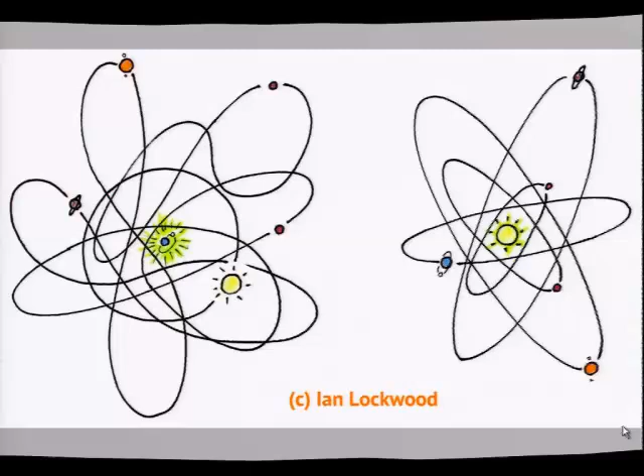And how do we get into this big mess? Well, when scientists thought that our sun and the planets revolved around the Earth, they had to concoct these complex formulas to predict orbits. And when they realized the planets actually revolved around the sun, the math sort of fell into place. In a similar way, when engineers put the car at the center of the universe, it's hard to figure out the relation to commute, schooling, all these other things you see floating around. When you put the person at the center, the design details accommodating the other components sort of fall into place.

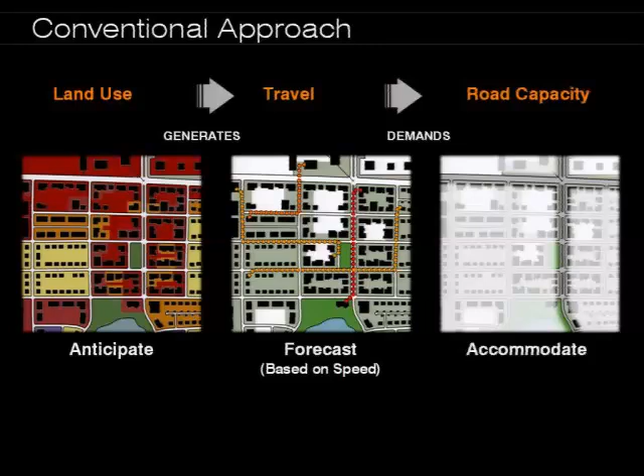Our conventional approach to transportation planning: land use happens, it generates travel and demands roadway capacity. Now, how is land use integrated in this process? Future land use is anticipated, traffic is forecasted, and the future investments are expected to accommodate the demand. So how can we do this differently? Well, can transportation investments be multimodal? Can they help manage traffic or travel and be coordinated with land use?

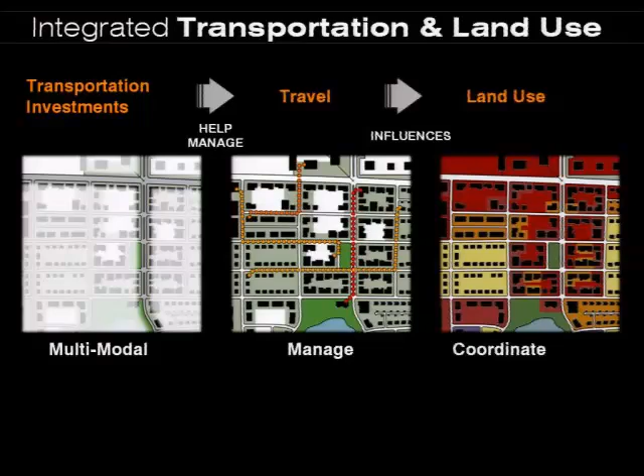Well, multimodal facilities need to be planned along with land use. They need to address the demand for walking, cycling, and transit, as well as driving. Here's what we are developing to address these demands. In Florida Department of Transportation, we have what's called a Plans Preparation Manual, which includes a chapter entitled Transportation Design for Livable Communities. That chapter tells us that prior to being able to apply these guidelines, we need involvement of the right stakeholders and incorporation of the chapter's intent during the planning and project development processes. The problem is, no one has written a corresponding planning chapter yet, and that's where we're at.

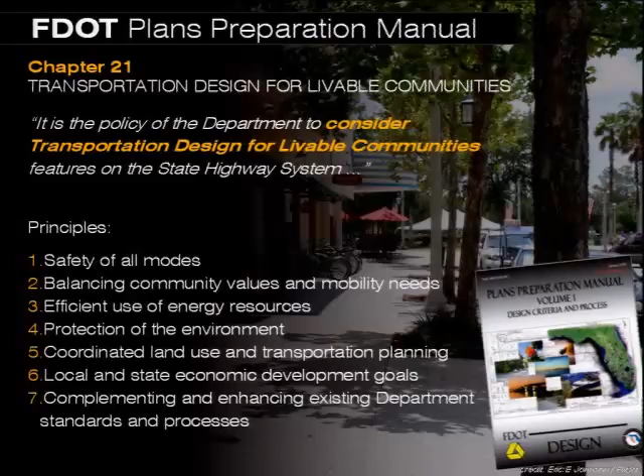The basic formula for transportation planning starts with asking the right questions, not simply asking our partners what projects do you want, because usually they say widen something. That's what we've been doing for the last 30 or 40 years. But we want to determine what problems we have first, what opportunities we have, and how we can work with stakeholders to make our communities more competitive and sustainable.

Here's a quick example of a DOT-led planning study we recently completed: State Road 50, a multimodal corridor study in the city of Clermont, south Lake County in Florida. Here's the process we used, beginning with the rationale for the study and determining the challenge at hand. We obtained a detailed understanding of the problem through stakeholder interviews, mapping and analysis, fieldwork, and traffic modeling and analysis. We developed guiding principles through a planning charrette that will be used to develop and evaluate future corridor scenarios. Then we prepared a corridor action plan.

So that's totally different than the way we're doing things today. These are the ways we really look to see the interests of our stakeholders, what do they really want, and how can we deliver it. We are developing ways to deliver this that are not in accord with the trend as we have it now. Thank you.

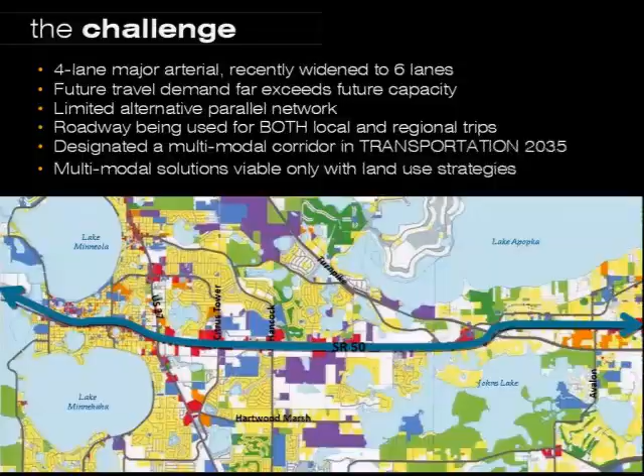And so this is what it looks like. The corridor is State Road 50. The pattern is pretty suburban in nature. Just a little more context: this is State Road 50, downtown Clermont, which is a small historic community on the western end of the corridor. But 30 years ago, along State Road 50 were all rural citrus orchards.

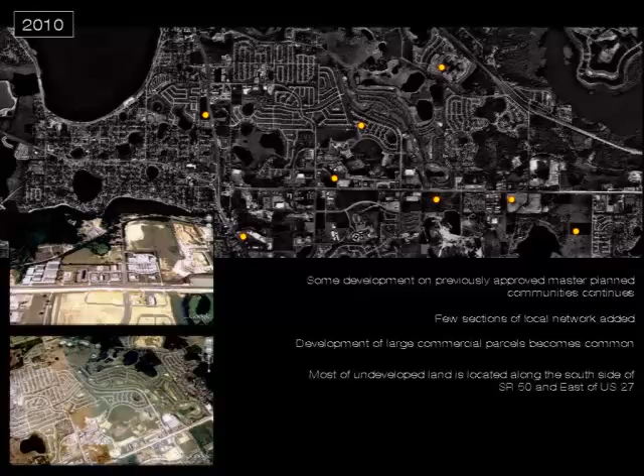So the suburbanization didn't happen that fast or that long ago. This is 1999, fast forward, all the orchards are gone. There were a couple of freezes that happened in there, but this is 2010. So it's dramatic suburbanization that caused the issues State Road 50 is handling. State Road 50 transformed from a commuting regional corridor to one that has to accommodate both local and regional traffic, and within how the state roadway is designed, it was really tough for that corridor to handle it.

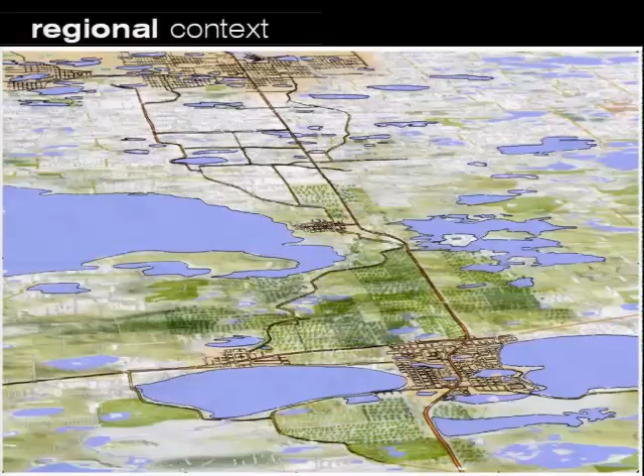Zooming out a little more, John mentioned that it is west of downtown Orlando. So downtown Orlando is here, this is Clermont, the small town, all the citrus farms. What really changed its use and function is not only because of this suburbanizing pattern, so Clermont transformed into a bedroom community, but also the regional roadways that happened. This is the Florida Turnpike, State Road 408, that connects downtown Orlando to this site, which changed what is needed for State Road 50. So the function of the road, and the road itself supporting the community, changed.

So this is it again in context quickly. John mentioned that we looked at traffic, and this notion that this is a commute corridor with only regional traffic going to Orlando using it, we were surprised to realize this is no longer the case. More than 50% of the traffic on a state roadway designed to accommodate regional traffic is actually local serving traffic. They start within the corridor and end within the corridor, so they are trips of 3 miles or less that could be done with another mode if the facilities for that mode were there and the land uses were set up right.

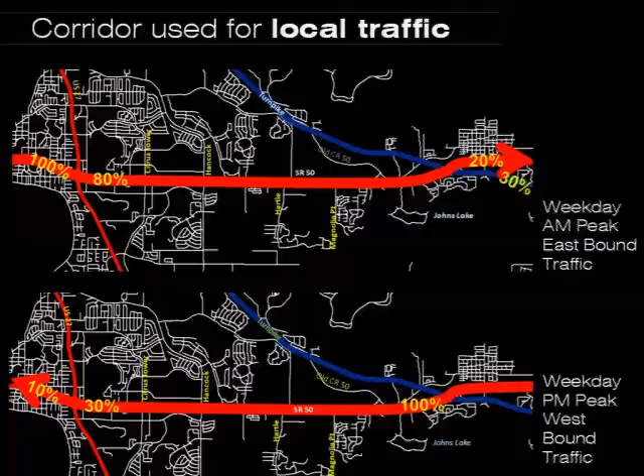So again, why does this happen? This is downtown Clermont's street network. This is the network east of Clermont. This is what happened in the last 30 years. So again, which one of these networks would allow for the multimodal travel that we keep talking about?

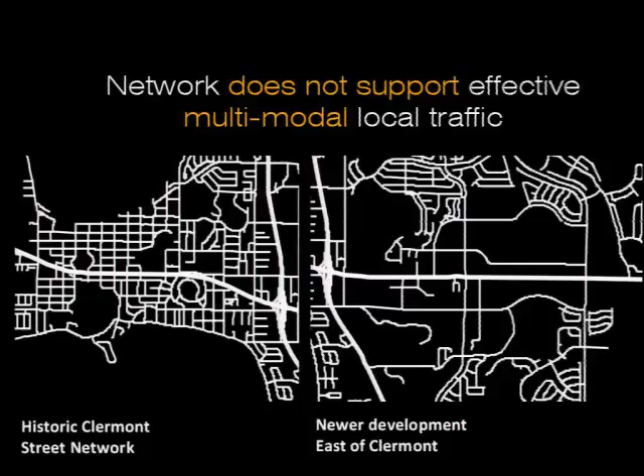As John mentioned, we're serious about engaging the local land use partners in this exercise. We did hands-on interactive charrette sessions, understanding what the issues are. It came out not just from the data we were looking at that local traffic is the more important one to solve, but also from the stakeholders' input themselves. We developed some guiding principles. I'd like to call your attention to the fifth one that the stakeholders told us: turn the car around.

So we really don't want to be a bedroom community to Orlando anymore. We want to be a complete place within our corridor, within our community, and we don't want to drive out of the corridor. So we were communicating with municipal leaders, business owners, and property owners through this workshop and through this study, and we wanted to make sure we develop concepts that speak to them.

These two concept plans happen to be a demonstration site along State Road 50. It's a greenfield site that had a planned development of regional impact—a DRI—of 30 acres. When we started the project, they said, well, we are really serious about multimodal. We designated our corridor a multimodal corridor from a policy perspective. Is that enough? Multimodal requires a certain land use, which John talked a lot about.

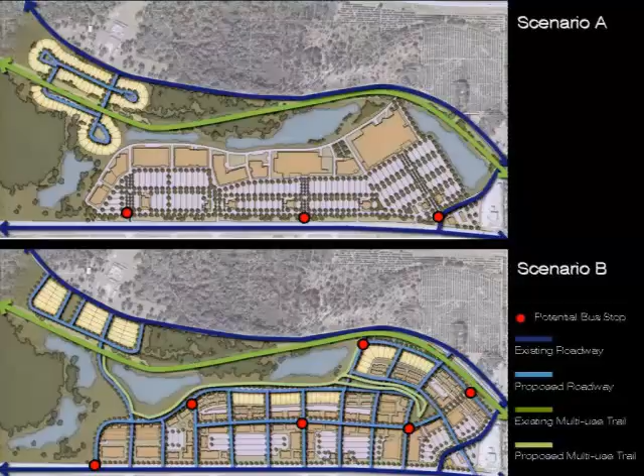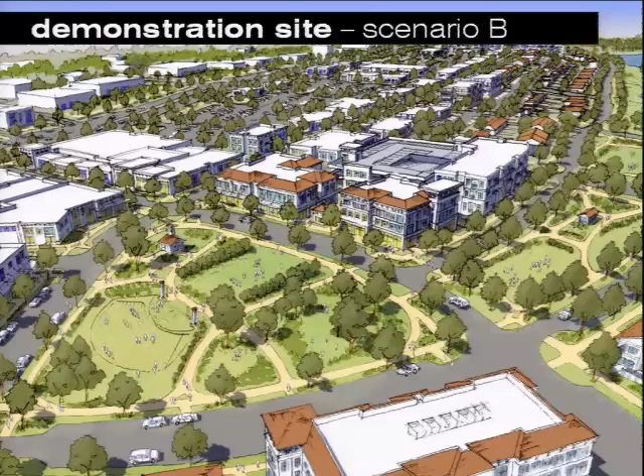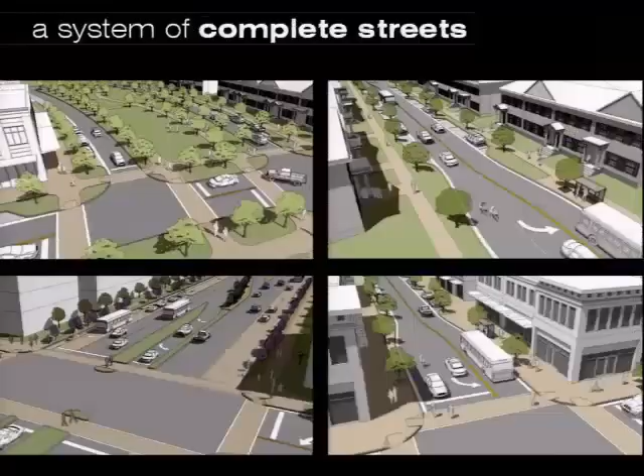So here are just some images of what that might look like, and we shared this with the elected officials and community leaders to really speak to them. Clermont, as you know, is a small town, and densities are important. They want to see what kind of development we're really talking about, how transit could be incorporated, and developing a complete system of streets that serves local traffic as well as regional traffic at the same time.

One more point—this is borrowing from one of our own, Peter Katz's work in Sarasota County. The DOT has recognized that transportation investments yield economic development, but specific transportation investments yield different types of economic development.

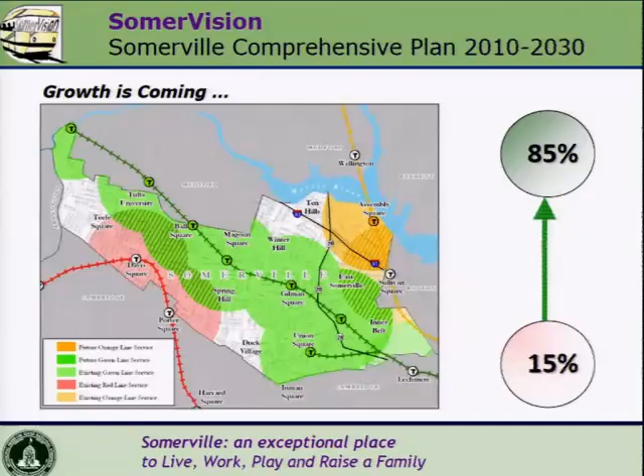So the first thing I've learned deals with our comprehensive plan, the SomerVision comprehensive plan we just finished. Comprehensive planning need not be boring, and it can actually be really helpful to shape the center of a community, and to keep us a little edgy and make sure we know what we're doing. A lot of communities in Massachusetts don't even do comprehensive planning because not many people make us do it.

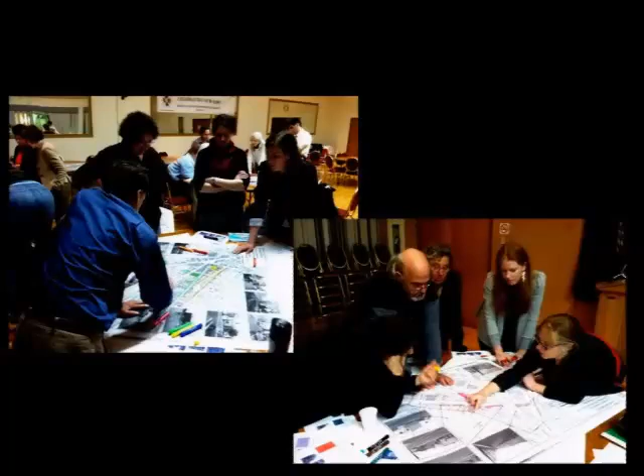But at the same time, we realized that with all this change coming, we needed to know where we were going. We needed an accessible, reasonable, easy to understand vision - a list of our values about diversity and community, a list of what's important to us in a community generally filled with 2- and 3-family houses on very small lots, a community well known for the fact that Cambridge seems to get all the economic development and we get all the 3-family houses.

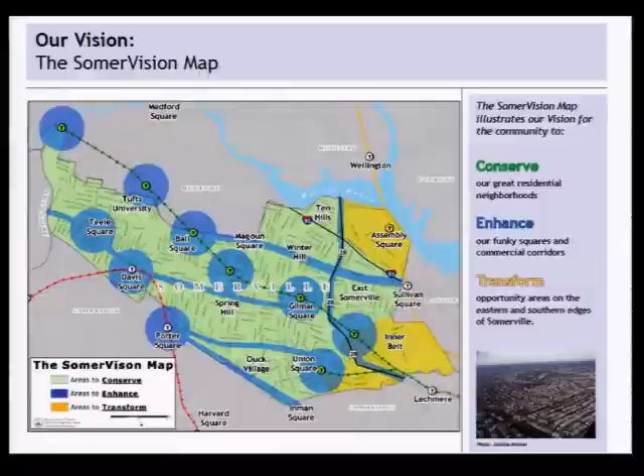But we could actually do some change with this transit while still protecting our neighborhoods, find an opportunity for 30,000 new jobs and 6,000 housing units, and do it mainly in areas around the transit stations while preserving our neighborhoods at the same time, and explain it all through a plan that actually has language accessible enough for people to understand what's going on.

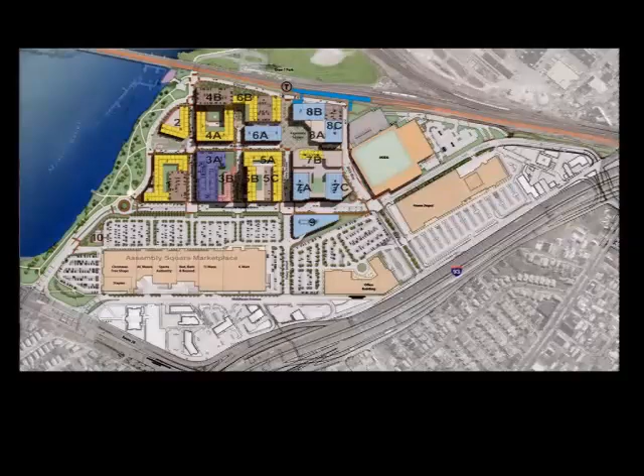So we finished that, and we've looked more into what's going on with our stations. We've had one running ahead of the whole process at Assembly Square—so far ahead they've been working on it for about 20 years, which taught me that good urbanism is worth the wait, and sometimes it's a very long wait. A half generation ago, people wanted to put strip malls up here with the train running by, and we pushed to get transit and access, and we got the opportunity to build a mixed-use development here, and hopefully someday get rid of the rest of the strip malls and really change the nature of the place.

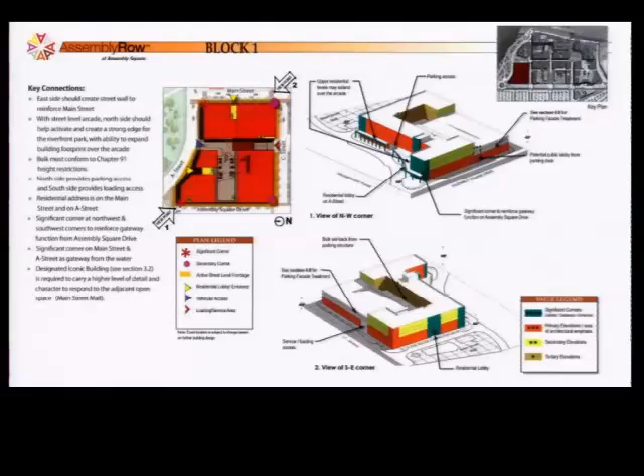In the process of doing that, we've also been able to, even without a form-based code, push a developer into giving us a design standard that's resulting in new construction and new activity around a transit station that's actually being built.

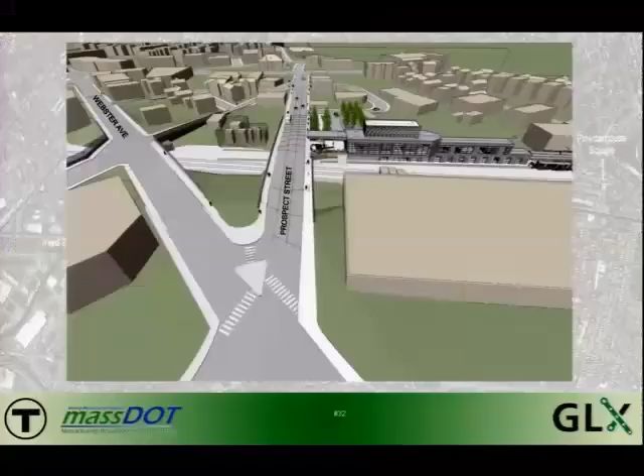We want to bring back the quality of everything we could do around our center, and there's a lot of excitement around Union Square, although we do have parking lots fronting some of our best restaurants—though our restaurant owners want to put pop-up cafes there, so I like that.

We've really looked at, though we don't necessarily have the answer yet, options like expanding the size of our plazas, changing one-ways back into two-ways, reclaiming our roads for ourselves, and making sure that when we sponsor transit-oriented development here, it can happen in a format that works for us.

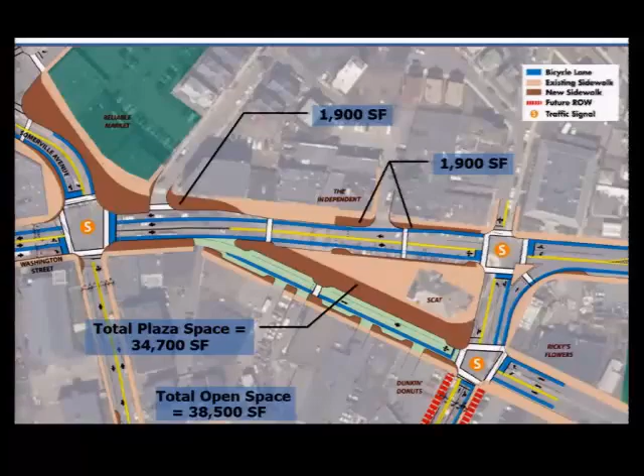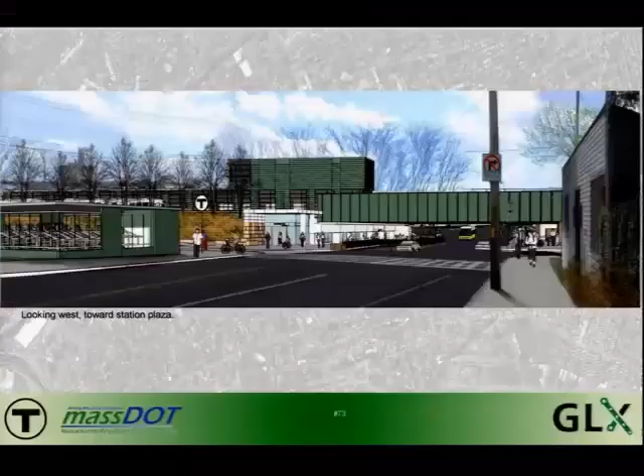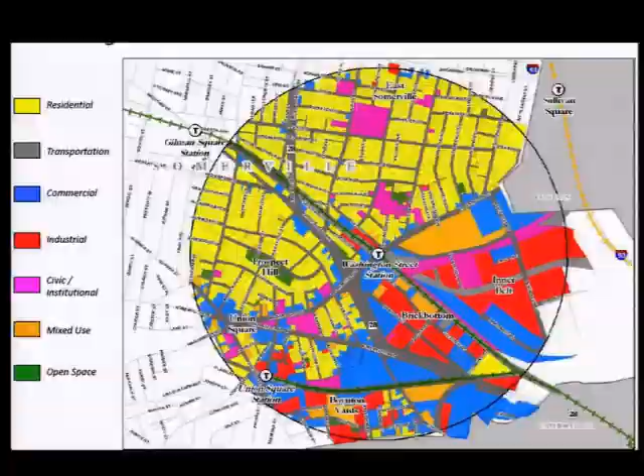What we started talking about is the idea of this being the one place in Somerville where maybe we'll actually allow someone to build a by-right project, creating a form-based code that allows room for creativity. What we've realized as we've done visioning there is you can do some really creative things, even with just a minor street change to the area.

But if we can code this, we can do something really cool, and we can sort of open up innovation in one place in such a way that it will allow some things to work for us that you can't really do in the middle of Somerville's neighborhoods.

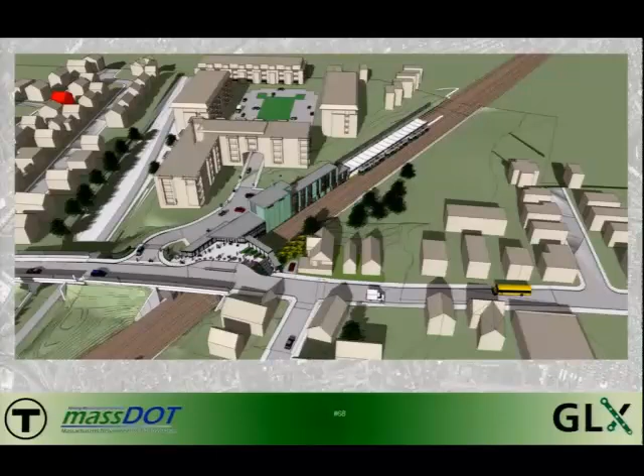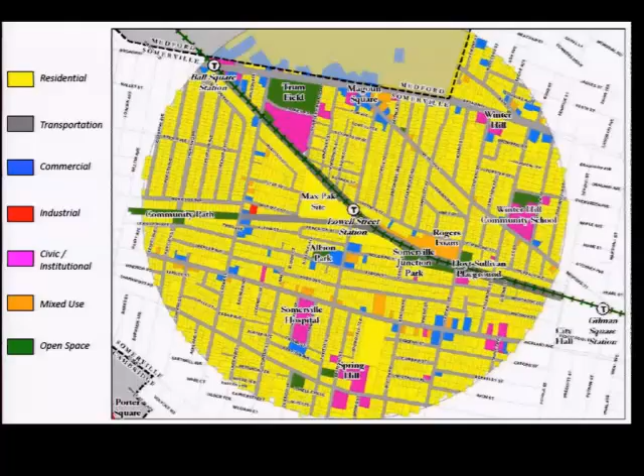The fifth thing we've learned is that while New Englanders are very suspicious of anybody coming from out of town and telling them what to do, we can adapt everything we've learned about charrettes and use it to our own advantage. With a number of our stations in the middle of our neighborhoods, really in the core of our residential areas, we're engaging in a process this fall where we're basically taking everything about the charrette and unpacking it. We're still doing a planning process that's a couple of weeks or months long rather than a couple of days, but we're including all the feedback loops, all the general strategies of a charrette, with a couple of design sessions packaged almost back to back.

And what we've basically done is unpack the charrette concept to make sure that people here feel comfortable that what we're doing in the future is something that reflects and works with their past, and that will allow maybe a neighborhood town center like this to change a little bit with the transit coming, but wouldn't radically change their world in such a way that they wouldn't be comfortable with that difference.

And we're going to do it through design, and because we're fixing our code, we're going to make sure to code that as well, although I'm not sure I'll be able to get it quite as open as the area where we have been working before, in Brick Bottom.

My sixth lesson is actually really simple, which is that the Sustainable Communities Program at HUD has been the most helpful thing that has ever happened to us. It has helped us fund our programs in dealing with station area planning. It is helping us fund our comprehensive plan. It is making it possible for us to do a whole lot of work on changing our zoning and opening up conversations that we in a small city planning office would not be able to do without it.

Next up, we have our final group of the day, a team consisting of... I'm Anne McIlroy, and I'm here with Jessica Hawes with our firm, and David Shijeki with Metrolinx, who are an agency of the Ontario government charged with the mission of revitalizing and improving transit on a regional basis. We're going to present today 3 case studies in the City of Toronto.

I'm going to talk about Dundas West Station in one of Toronto's better, greener, and more successful neighborhoods near High Park, for those of you who know the City of Toronto. Jessica's going to talk about Kennedy Station, which is in an area of Toronto that is transforming, more of a suburban location, and then David will speak about Weston Station.

But we're going to talk about station design, which is a very common thread as a theme that's coming out today: mobility and refining mobility. Porter Airlines' motto for their airline is 'flying refined.' I think this idea of travel refined in general is something we're all touching on, particularly Kevin in his last presentation today. So how can we refine this travel and think about these stations as places that are civilized, comfortable, visible, and attract us to them?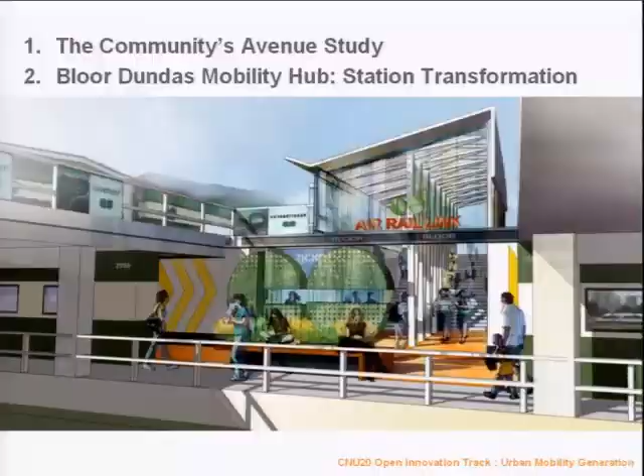I want to touch on a bit of a story on the Dundas-Bloor Mobility Hub and its station transformation. We were very fortunate in this project to actually work with the community prior to the station design. So we had the opportunity to conduct what is referred to as a Dundas Avenue study, which looked at transforming their main streets, two main streets in close proximity to two transit stations.

So we met with the community over a year and developed a mid-rise building typology for those streets, which would allow all the existing fabric to remain on the street, but would allow for the kind of intensification they felt comfortable with, based on the look, form, and right-of-way of the street, which was basically a one-to-one building ratio. The outcome was something that the residents and business owners were very much tied to. It was their vision, it was their plan.

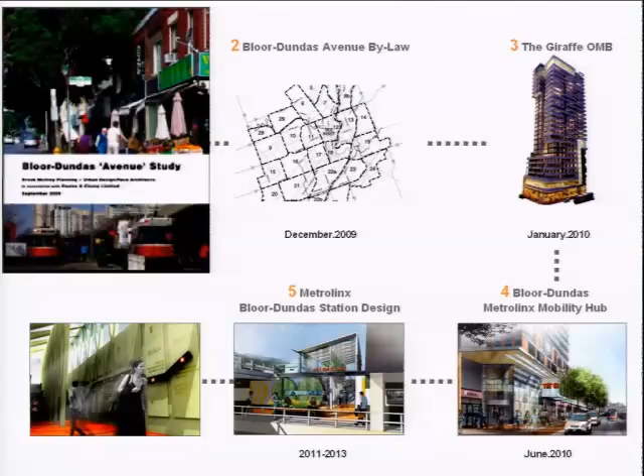The city then undertook to prepare a zoning bylaw, which was very important because it reflected exactly the outcomes of the Avenue study. The residents and business owners became stewards for that bylaw. They actually helped write portions of it, which was very timely because at that time this was one of the key developments going forward: the Giraffe, a 27-story building on a tiny site.

Given that it was near the transit station, the developers felt this was an appropriate development, but the residents did not. So there was a fight to combat this development, and it was refused at our planning court, the OMB.

Then the following year, we had the opportunity to begin the Mobility Hub study. The Mobility Hub had quite a number of components and areas, and I'm going to focus on the station design itself. Suffice it to say it was a good news story for this community, because we had developed a strategy for their building form and the fabric around the neighborhood. It took us into the whole fabric of the streets.

And this is what stations are. This is what mobility is. It's not just the platform you get onto or the turnstiles you go through to get onto the bus, the streetcar, or the subway. It's really about the fabric that takes you there, the edges of the building, and the human scale that affords as you get there.

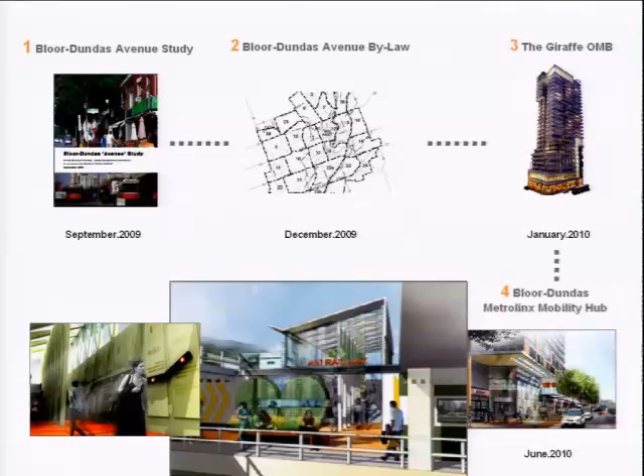And then, of course, when we got into developing the station design itself, you'll see when I show you the existing images, we were trying to create something very specific: lean, green, bringing in natural daylight, making people feel welcome—a little bit like the Apple Pavilion in Midtown New York, a glass pavilion that takes you underground to that large civic plaza. Thinking about how you can take passengers to the subway underground and up to the tracks in a way that's attractive, well-lit, safe feeling, and well-protected, giving you that feeling once you get in there, orienting you to your place and the destinations you are there to depart to.

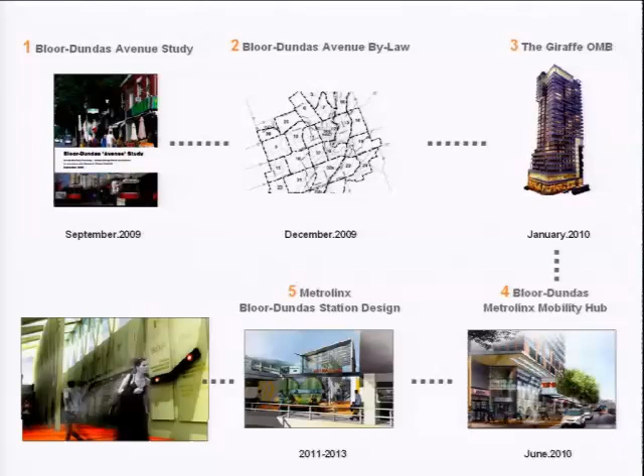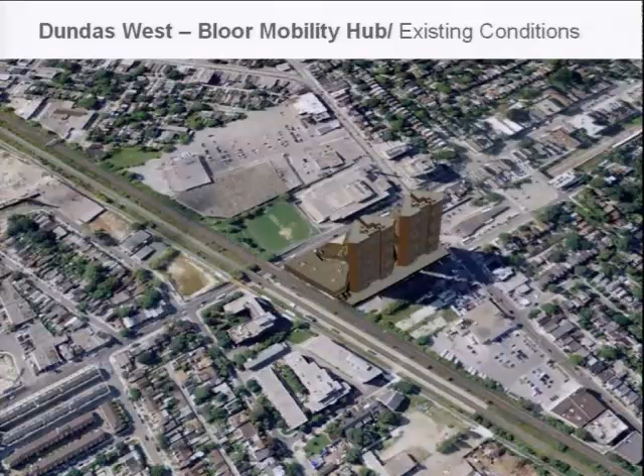So some of the existing conditions, you can see the area and the rail corridors they're running through, a lot of large format industrial buildings, large format retail in the area, but then this marvelous context of older neighborhoods on leafy green streets. The mobility hubs themselves look at a variety of zones, the primary, secondary, and tertiary zones, which in terms of the primary, are based on a real sense of walkability and what's immediately in the vicinity and what belongs there. You can see the location of High Park nearby.

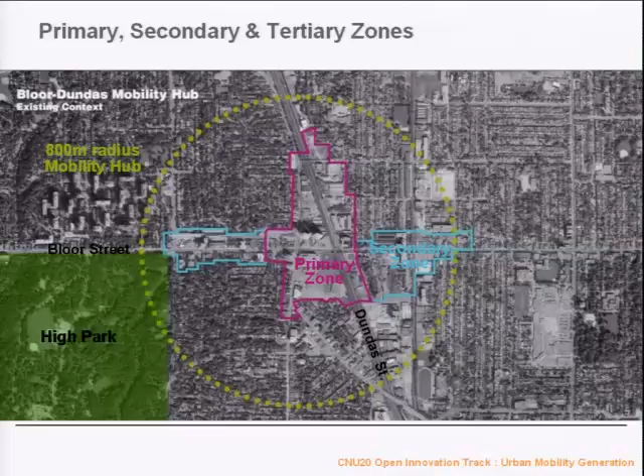And in the secondary zones, those are the areas where people are actually traveling to the stations from in a very walkable manner. As I mentioned, we addressed through the Avenue study a number of areas throughout the community in a mid-rise building fabric, determined to be about 6 to 8 stories depending where it was. As of right would be 6 stories, because that was a building height people felt worked through the width and depth of buildable blocks, the right form to get a tremendous amount of density happening in one location.

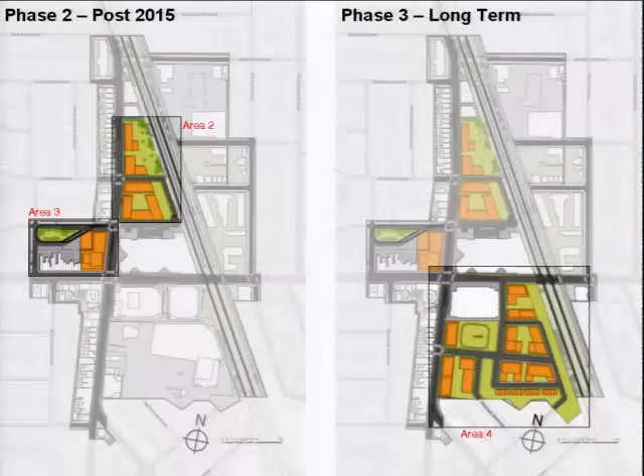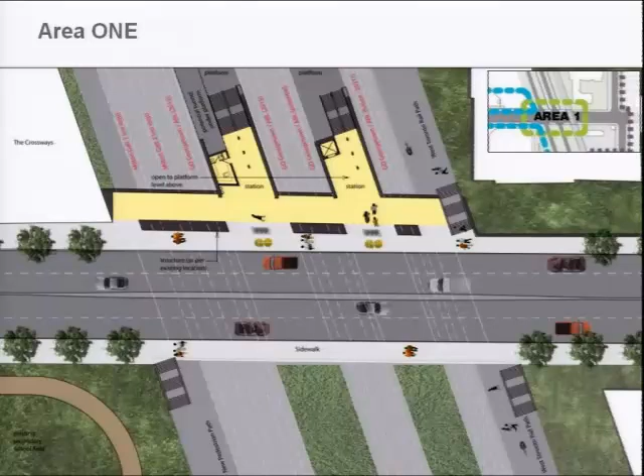So a simple intervention of just pushing back the abutment of the underpass and bringing people into the station through a connected walkway, a widened sidewalk, places where you can park bicycles, buy a ticket in the station, have visibility of where you're going, and get that information. And then interconnect through a system that would take you to the subway underground as well.

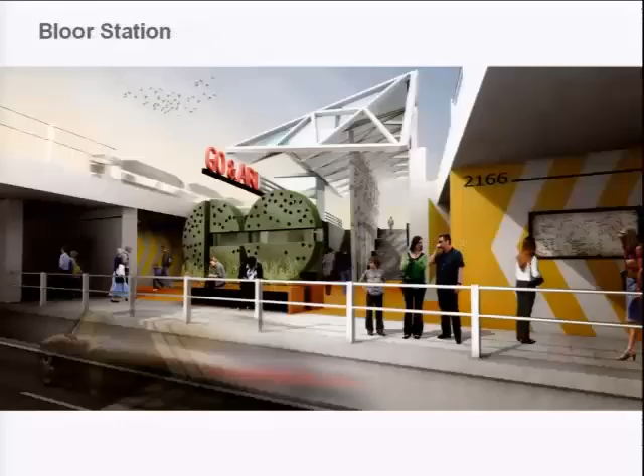But the key thing about the station is that it would be welcoming, that even at this stage of conceptual design, we actually create an image and a vision for the station that the community buys into, that they're part of designing, and that they like the look of. It becomes that icon for travel refined that begins to set the standard for what you will find everywhere else on the way on your route.

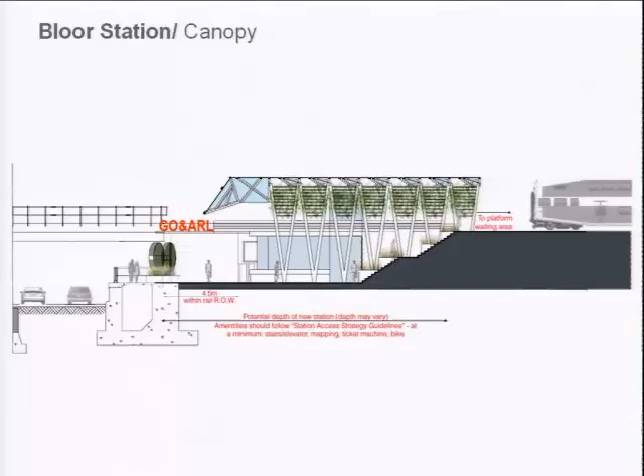The canopy becomes the key element. It is visible from a distance, or it will be when it's built. It protrudes across the sidewalk, it lets light in, and it makes people feel oriented and welcome.

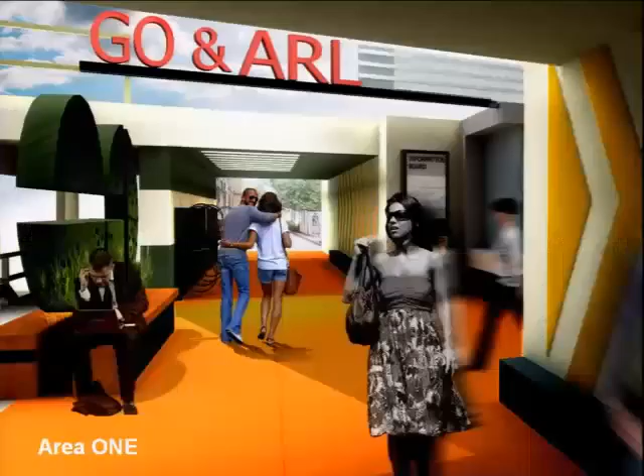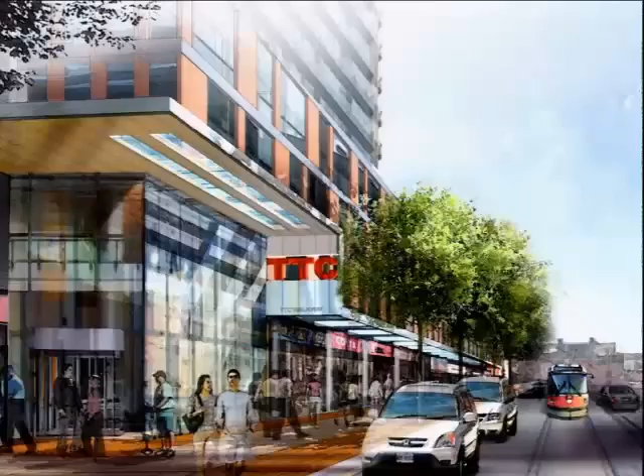And then when you get into the interior, you actually have the opportunity to buy a ticket, park your bike, store things in lockers if you want to leave them behind for the day, and find out where you're going. And then come back out at the end of your journey to the sidewalk and this dank underpass we saw before, and be oriented beyond to the city and the fabric of the neighborhood that lies around.

And I'll pass it on next to Jessica to talk about the Kennedy Station.

Thanks, Anne. So a very different context than Anne's presented in her presentation, and also a very different stage of study that we're looking at for this mobility hub. The Kennedy Station is actually a study that's underway, but it provides a very interesting context in terms of the more suburban nature of the community that we're dealing with, and really deals a lot with the uplift potential for this area, making sure urban development can happen in a way that's cohesive with the transportation planning.

Just in terms of the high-level principles of a mobility hub, generally these studies have, and we're very lucky that Metrolinx has already prepared a series of very detailed guidelines about the process of determining a mobility hub, but also the process of studying them. And so that process a lot of it is to do with working with the community, working with stakeholders, and also working with Metrolinx themselves.

So first, like all good planning exercises, it starts with guiding principles. It starts with working with the community to determine what they would like to see happen in their area. How will the mobility hub affect this area? This mobility hub is very different because there's a new transportation line coming in that's supplementing the existing lines that are already there today. So there is really an impact of change that can occur.

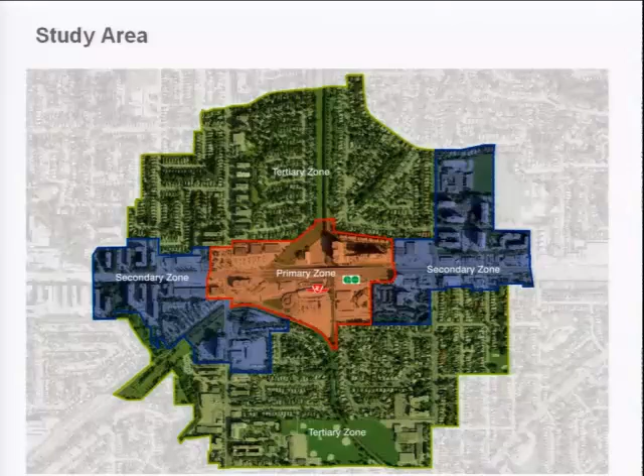And then the tertiary zone is really your stable residential neighborhoods and the people you want to connect to and bring into the station. To give you a little bit of the challenges we have associated with this study, Eglinton Avenue...

You can see the mix of residential, a lot of single family, and then a variety of buildings set quite significantly back from the street in the center areas along that main strip of Eglinton, which is the center road moving east to west.

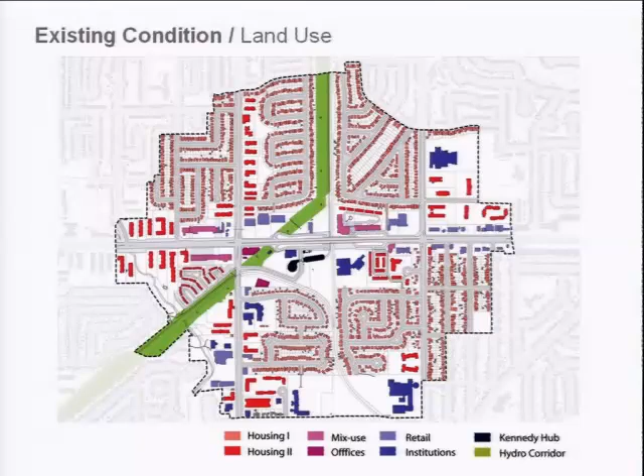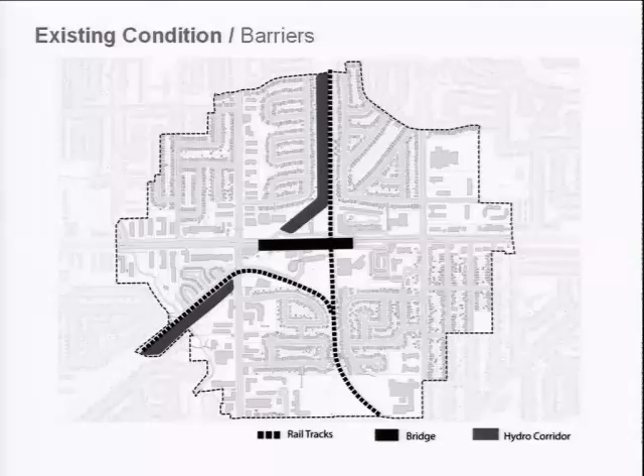We also have the challenge of significant barriers. With transportation comes these types of elements that are difficult to navigate. The rail shown in the dark black dashed line, the bridge in the solid black box, but also we have the added element of a hydro corridor in this area, which does create a no-build zone. So there is a lot of challenges associated with it.

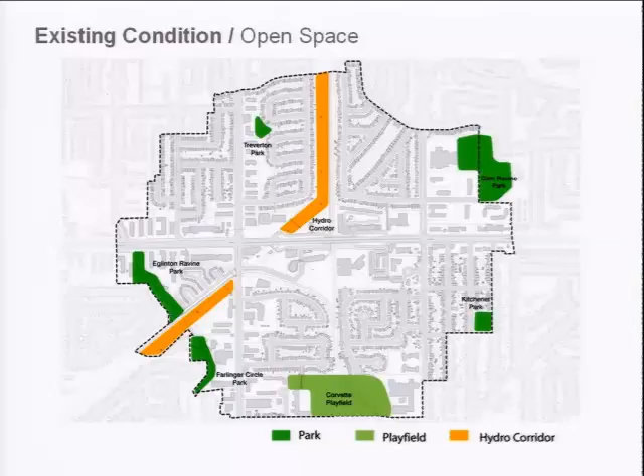There's already a lot of open space, but you can see there's a big hole in the center of where the station area would be and where we would be targeting the area for redevelopment. And then most importantly, working with the community to determine what the character of Eglinton Avenue will be, to make sure that people are comfortable walking to and into the station.

One of the single things we learned in this process very early on is nobody walks into the station. Everybody takes a bus from a block away, or 2 blocks away, or 3 blocks away. So this study is really about how we can change that.

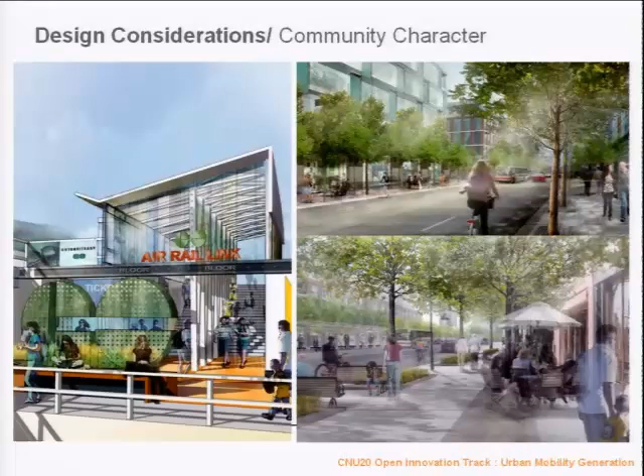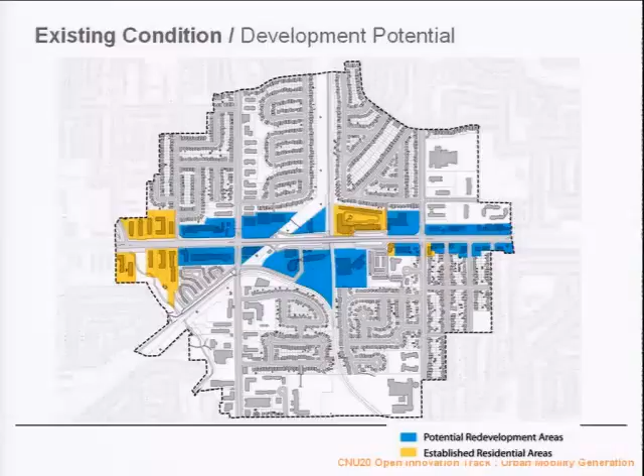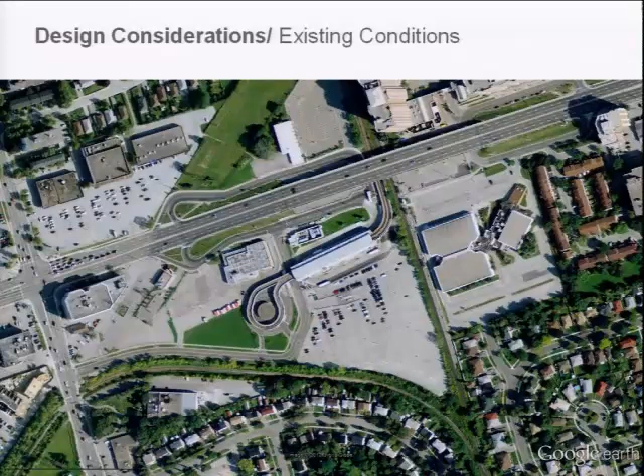This is the station area itself. You can see it's a suburban station. The long box is the subway interface. There's also a significant number of buses that come here as well. And then you can also see the SRT line, which is a ground rail transit that comes into this area. Soon it'll also have added to it, in the blue line, the Eglinton Crosstown, which is a complete east-west connection north of the city center that is going to connect from east to west.

You can also see from this drawing that those transportation connections are significant in this area, and they have a significant impact on the buildability of the areas directly adjacent to your main streets, your main redevelopment areas.

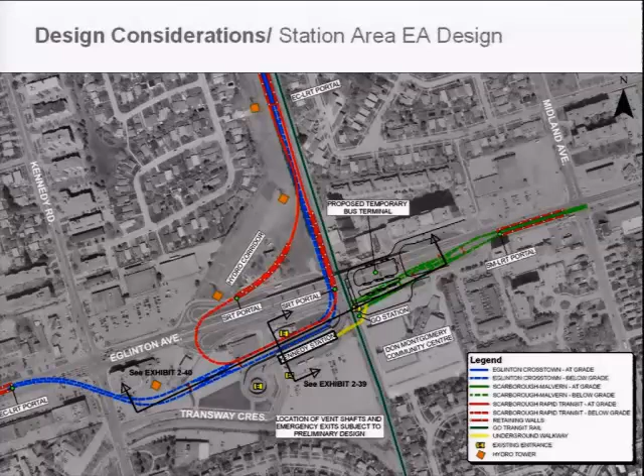So part of our challenge in moving forward is to take this transportation plan, take all these elements of transit that are so important to link this community, and start to look at how that station uplift can be balanced with the transportation design. So when we start to overlay just a series of quick colors, you can really start to see the areas that are constrained for redevelopment.

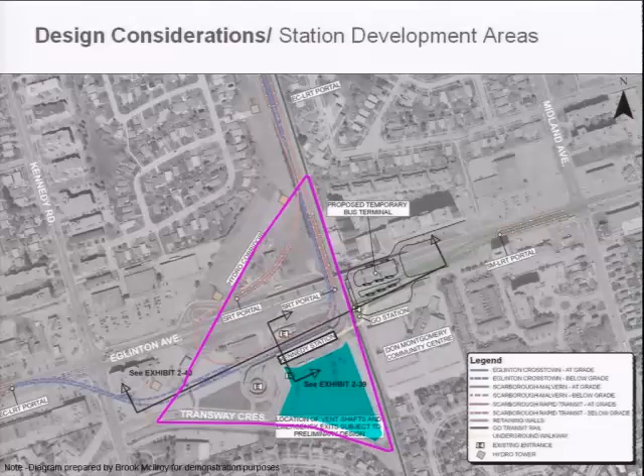So as we move forward, our process in working with the transportation authorities, working with the TTC, which is the Toronto Transit Commission, Metrolinx, and stakeholders, is defining how that can be reorganized in such a way that it allows for redevelopment along the most important catalyst routes.

Again, at our disposal, we're very lucky to be working with Metrolinx and with TTC, and we have a huge amount of stakeholder experience in dealing with this. In terms of moving our process forward, the most important thing is making sure we have a collaborative process. We have a lot of streams of communication happening at the same time, so making sure those are tied together and cohesive, taking a cohesive approach moving forward so that everybody's on the same page, is important.

We haven't been to the public yet as part of this process, and determining the ultimate vision and character of buildings will be with them. So a lot of that is missing from this presentation. Something we focus on is not being overly prescriptive, to allow development to happen, to evolve, and allow good design to flourish. That's really the focus of our work as part of this study. So I'm going to hand it over to David.

Thanks, Jessica. What I'm going to be talking about today is government's role in terms of transportation planning. Specifically, government has a goal in these types of transit infrastructure, and that's to build soft infrastructure—infrastructure that is both empathetic and thoughtful to the communities it will be built within, and not divisive.

A really important factor is the government's role in making sure that what is planned is also implemented. I'm both an engineer and a planner, so there's a bit of a schizophrenic conversation happening within myself. It tends to be a battle between vampires and werewolves, where one person wants to build something and another says no, you can't build that. So we retain firms to review the drawings as they're being made and provide input to make sure the integrity of the original design is met.

Now I'll walk you quickly through a few of the high-level design principles we developed for the site. If I can go back one, two.

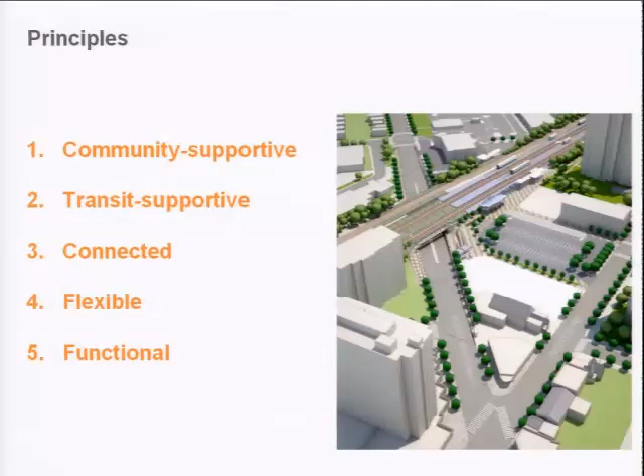This shows the site right here. Metrolinx owns a few acres of property within this area, and the city is looking at this as a catalyst for revitalizing the neighborhood. As we own land, we've been in discussions with the local YMCA, a local college, and private developers to see what interest we can attract to the site, and whether transit will bring about that interest.

In terms of principles for the development we'd like to see built, first is that it should be mid-rise development, and the new uses should complement the existing street character. It's an old neighborhood, some houses date back to the 1800s. It'll also be consistent with the mid-rise and avenue study that the City of Toronto has adopted.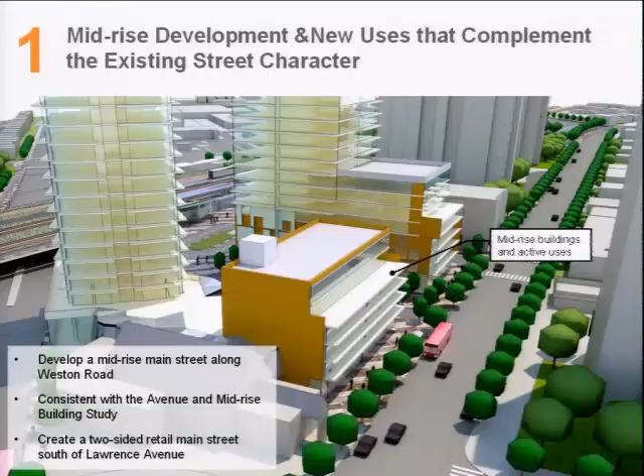Second is to locate higher density, high-rise development along the rail corridor to help with shadowing, and the floor plates of the taller buildings are to be no wider than 750 square meters, or 7,500 square feet.

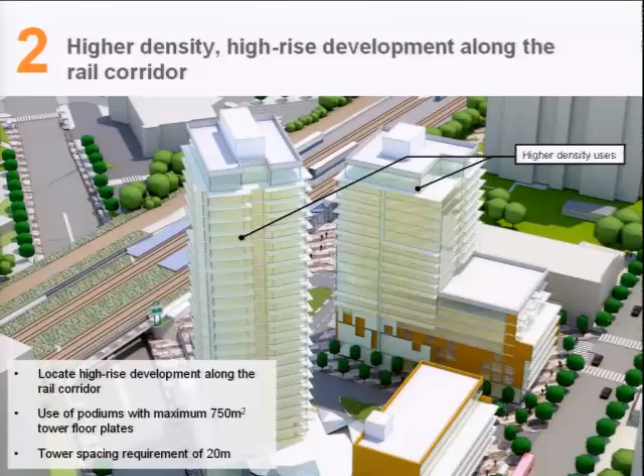One of the benefits we've said we would build for the community is a station plaza around the station. That's going to be up for 2015, with development coming afterwards around it. We want to make sure the development at street level along the station plaza animates that space, that it's transparent, and that over time retail will take over that space.

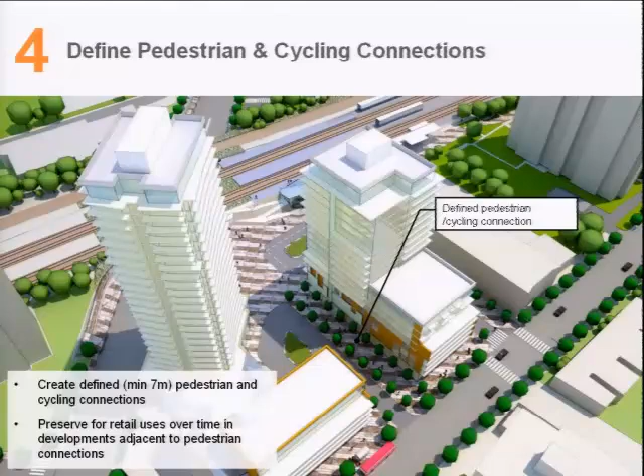We're also planning for live-work units there. Fourth, it's important to define the pedestrian and cycling connections early on, so that what we build in the initial station survives as new development comes in and builds on top of surface parking. So we've set a guideline of a minimum 7-meter wide pedestrian cycling connection podium.

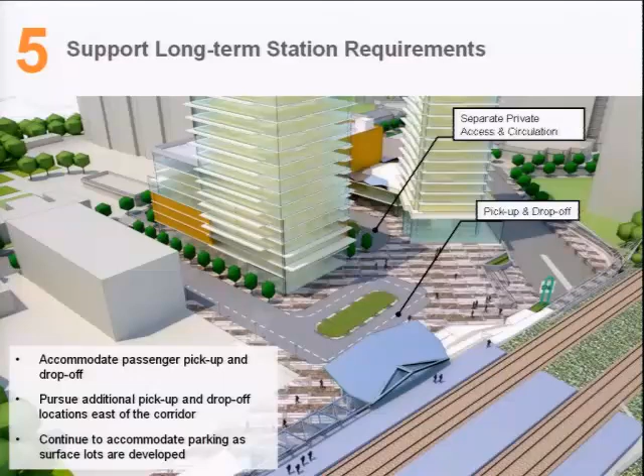Also, the design of the station needs to support long-term station requirements. The street and block pattern set for development will work for that development, but also works for our needs in terms of passenger pickup and drop-off, kiss and ride, and access to parking.

This shows the preferred concept we're working on right now. When we entered this project, there was a feeling in the community that if we brought transit investment, this would attract private development and the community would thrive. Through the process, we've discovered that a lot more than that is needed. Transit investment is very important, but that alone won't achieve the results we're looking for. We need community and neighborhood improvements too, in terms of social, economic, and visual improvements. That will bring the people, and when you have the people, private development will follow.